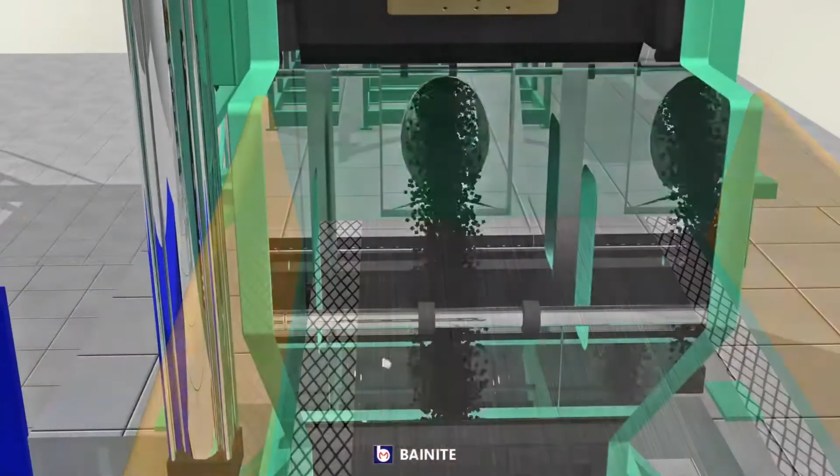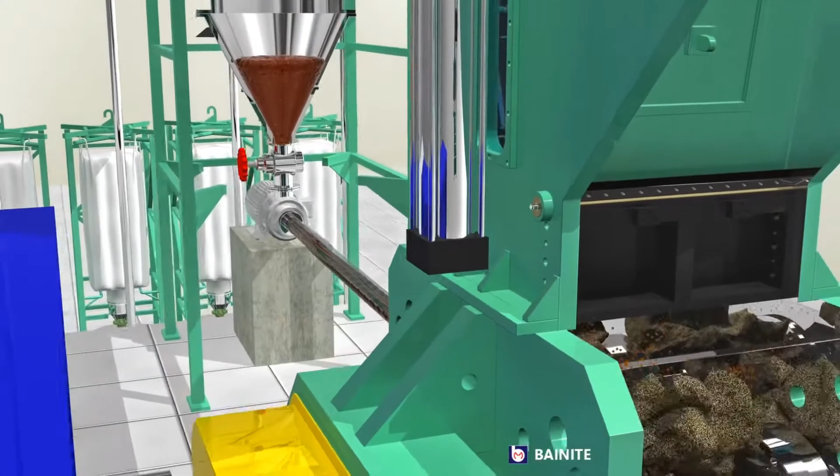In real production, filler may be loaded while oil is being injected. The rotors are turning, the ram may still be open, and the real work may only begin later when the ram comes down, the batch compacts, the rubber grips the material, and the mixer starts to build torque. So sequence is not only about the clock, it is about the condition of the batch when the ingredient enters.

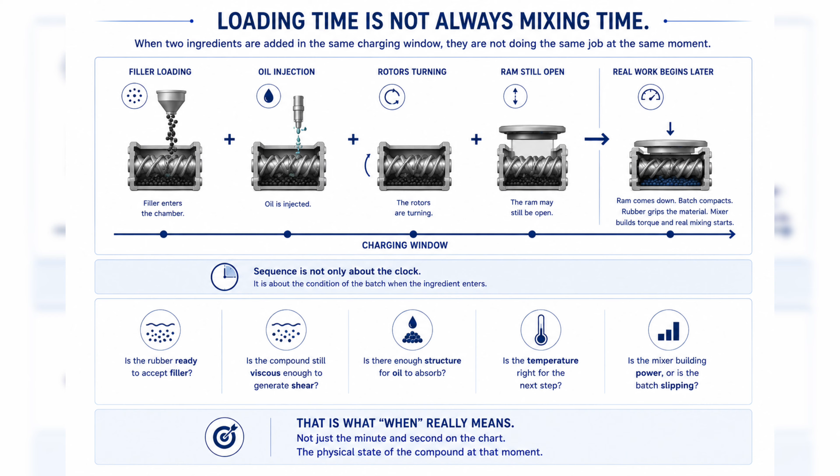Is there enough structure for oil to absorb? Is the temperature right for the next step? Is the mixer building power or is the batch slipping? That is what when really means. Not just the minute and the second on the chart. The physical state of the compound at that precise moment.

One of the clearest examples is the relationship between fillers and liquids. A processing oil or plasticizer can be very helpful. It can improve flow, help intake, control viscosity. It can help the compound accept larger filler loadings, but it also reduces shear.

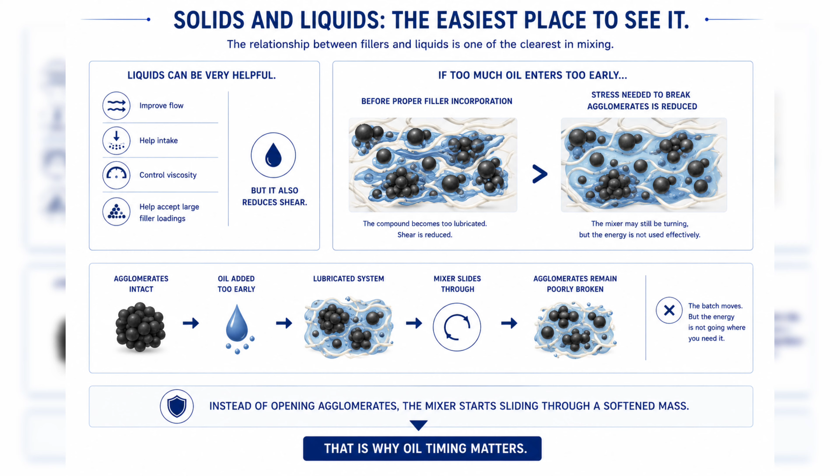So if too much oil enters too early, before the filler has been properly incorporated, the compound can become too lubricated. The mixer may still be turning, but the stress needed to break filler agglomerates is reduced. The batch moves, but the energy is no longer going where you need it. Instead of opening agglomerates, the mixer starts sliding through a softened mass. That is why oil timing matters.

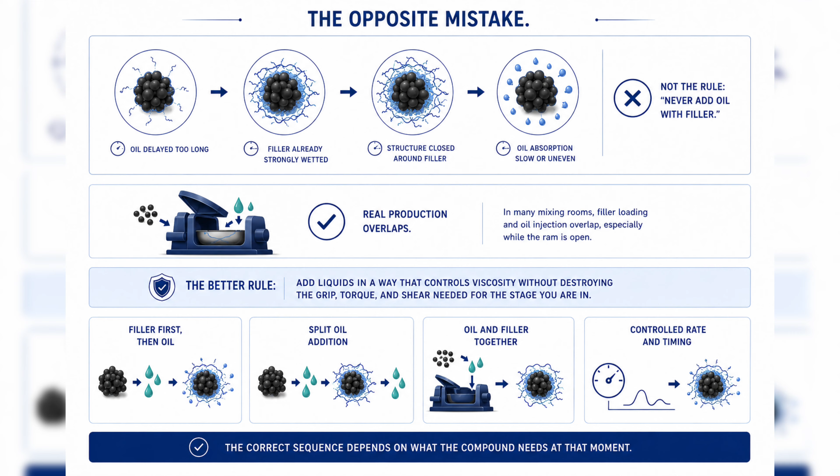But the opposite mistake also exists. If oil is delayed too long, absorption may become slow or uneven because the filler is already strongly wetted by rubber and the compound structure has closed around it. So the rule is not never add oil with the filler. That does not match real production. In many mixing rooms, filler loading and oil injection overlap, especially while the ram is open.

The better rule is this: add liquids in a way that controls viscosity without destroying the grip, torque, and shear needed for the stage you are in. Sometimes that means filler first, then oil. Sometimes it means split oil addition. Or sometimes it means oil and filler enter during the same loading window, but with controlled rate and timing. The correct sequence depends on what the compound needs at that moment.

Carbon black and silica both need shear, but not the same sequence. With reinforcing fillers, sequence is never just about getting powder into the chamber. It is about making sure the mixer still has enough grip, viscosity, and torque to break agglomerates apart. That applies to carbon black, and it applies just as strongly, often even more strongly, to silica.

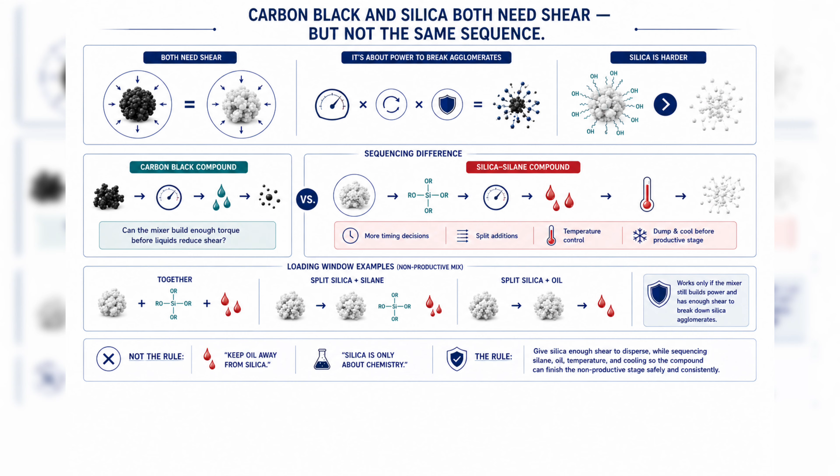Silica agglomerates can be especially difficult because silica has a highly polar surface and tends to form strong filler-filler structures. So silica compounds still need serious dispersive mixing. They need shear, power, they need the batch to pick up properly. In a carbon black compound, the main sequencing question is often, can the mixer build enough torque to incorporate and disperse the filler before liquids reduce the shear too much?

In a silica-silane compound, that question still exists. But now you also have to decide when the silica enters, when the silane enters, whether the silica is added in one portion or split additions, when oil is introduced, and when the batch has to be dumped and cooled before the productive stage. Silica and silane are usually introduced early in the non-productive mix. They may be added together, they may be added in split portions.

Oil may also be added during the same general loading window, often after initial pickup or with a later silica portion. That can work perfectly well, but only if the compound still builds power and the mixer still has enough shear to break down the silica agglomerates.

So the rule is give silica enough shear to disperse while sequencing silane, oil, temperature, and cooling so the compound can finish the non-productive stage safely and consistently. That is why silica compounds are often mixed in more than one stage. The first stage does the hard work: intake, incorporation, dispersion, and preparation of the silica-filled master batch. Then the compound is dumped and cooled.

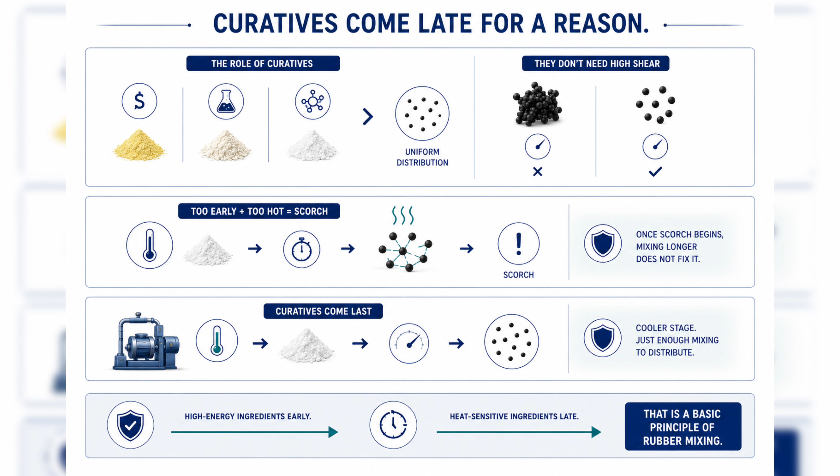Only later, in a cooler productive stage, are the curatives added, not because silica does not need shear, because it needs shear and timing control. Curatives come later for a reason. They are one of the clearest examples of sequence discipline. Sulfur, accelerators, and cure system ingredients mainly need uniform distribution. They do not need the same high shear work required for reinforcing filler, and they should not spend unnecessary time in a hot mixer.

If curatives are added too early, especially while the compound is still hot, the cure system can begin reacting before the compound ever reaches the press, and that is scorch. And once scorch begins, mixing longer does not fix it. So curatives normally come last in a cooler productive stage with just enough mixing to distribute them evenly.

Plasticizer, oils, and process aids have their own timing. Liquids and softening ingredients are not just there to reduce viscosity, they are tools for shaping the entire mixing path. Add a small amount early, and you may improve intake, reduce excessive torque, and help the compound start moving. Add too much too early, and you may lose the shear needed for dispersion. Add it too late, and absorption may become slow or uneven.

That is why many compounds use staged addition. A small amount early to help processing, more later after the filler begins to incorporate, or a delayed injection to finish viscosity adjustment without drowning the batch. The exact choice depends on the polymer, the filler, the oil absorption, the mixer type, and the target viscosity. But the principle is always the same. A plasticizer does not just enter the recipe, it changes the working conditions of the mixer. So its timing matters.

Polymers also have a sequence. When a formulation contains more than one polymer, the polymers often need time to blend before filler is added. Filler does not always divide evenly between polymer phases. It may prefer one phase over another, depending on polymer chemistry, viscosity, surface energy, and mixing history. If filler enters before the polymer blend structure is developed, it can localize unevenly. Later mixing may not fully repair that.